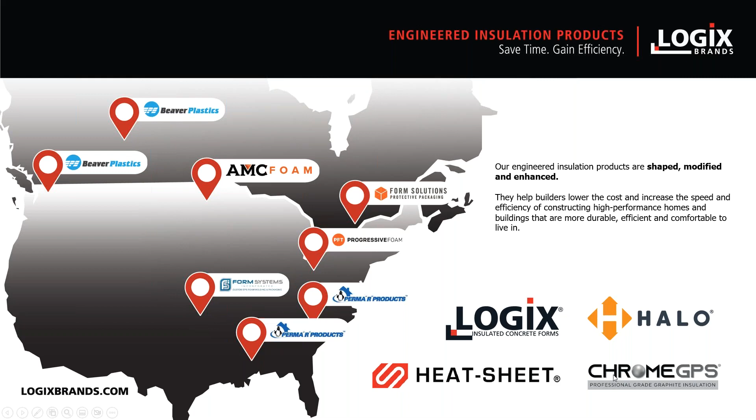And they're done so in a manner that helps builders lower the cost and increase the speed of construction while helping them build buildings and homes that are more durable, efficient, and comfortable to live in. So adding performance and increasing efficiency is all about the nature of our engineered insulation products. Here are the four brands of engineered insulation products that we go to market with: Logix, Halo, Heat Sheet, and Chrome GPS. And today we're going to be talking about the Heat Sheet product line.

So here's a picture of Heat Sheet, and we'll dive right into it quite shortly. You can see that it's certainly not a flat regular insulation product. It has been enhanced and shaped and molded, and we'll get into all the various advantages that Heat Sheet brings to the table. So here's our agenda today.

It's going to be about 20 minutes, 25 minutes, so we'll move pretty quickly. Product line overview. We're going to cover key design features and benefits. We'll do a case study. We'll talk about the difference of expanded polystyrene and extruded polystyrene. We'll talk about resources available to builders and dealers who work with Heat Sheet. And we'll talk about some insider tips, and we'll do, as I mentioned before, the Q&A at the end. So let's get rolling.

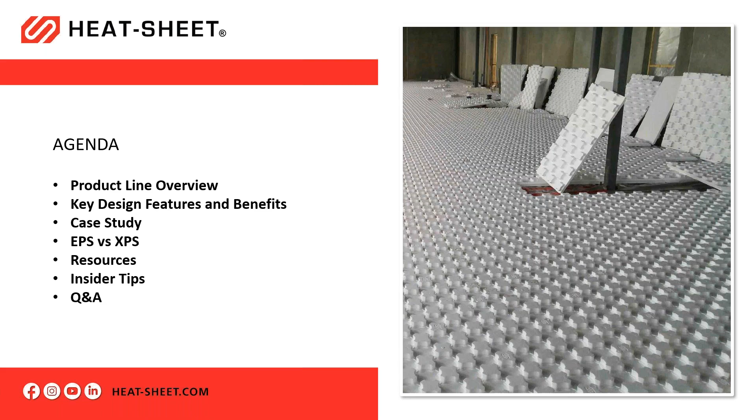First, I just want to give you a bit of a caveat. At Logix Brands, we know our products and we know what they do, and we're experts in engineered insulation products, but we're not experts in radiant floor heating. We're not HVAC designers, and we're not HVAC installers. So we can certainly talk about how our products fit into the process, but in terms of the overall radiant floor technology, we can answer certain questions to the best of our ability, but we're by no means experts in it. And I just wanted to qualify that.

So let's just get started. You can see here's the basic premise of Heat Sheet. It's a panel. It's got a track system molded into it, and you can see the Heat Sheet products being laid down on a job site. And you can see the PEX piping for hydronic radiant floor heating.

The PEX piping is actually laid into these grids, which create preformed channels that the piping can nest into and get secured into, and they're held in place, properly spaced, for a layer of concrete to be poured over, which, once the building's completed, is heated and provides great comfort to the building. So that's the nature of the Heat Sheet product line.

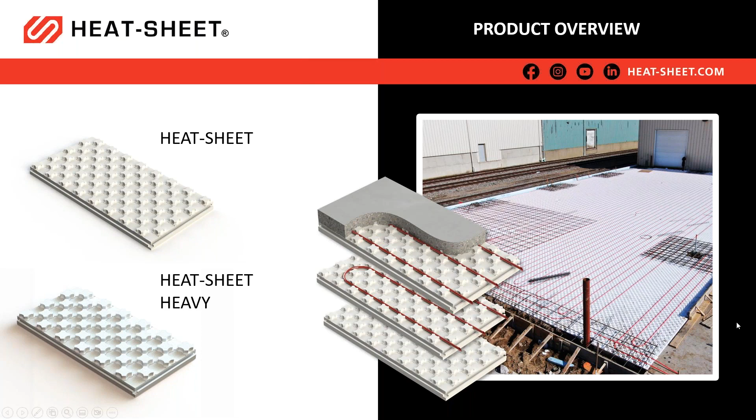There are two main components of the Heat Sheet product line: our flagship Heat Sheet product and Heat Sheet Heavy. And there's a lot of commonalities between the two. There are some differences, and we'll get into that.

So let's get into the very basics of heat sheet. So heat sheet comes in 4 foot by 2 foot panels. You know, we picked that panel size because we thought you could have made it bigger, you could have made it 4 by 4, you could have made it 4 by 8, you could have made it smaller, 2 by 2. We thought that 4 by 2 was just the perfect sweet spot for us and for our customers.

It's easy to handle. One person can pick up a bundle and move it around, and yet big enough so that when you're placing a product, you're placing enough square footage to make it an efficient process. Now, the nodules in basic heat sheet are 3 inches in diameter, and they form a grid pattern that's 3 inches on center. So the channels are 3 inches apart all throughout.

Now you'll notice that the panels do have an interlock right here at the edges. So the panels do interlock together and seal together. In terms of the compressive strength of the foam, heat sheet panels come in a variety of compressive strengths. The minimum compressive strength that they're available in is 20 psi, pounds per square inch. Often you'll see heat sheet offered at 30 psi, and it can actually be custom ordered to much higher compressive strengths, up to 60 psi for higher durability situations.

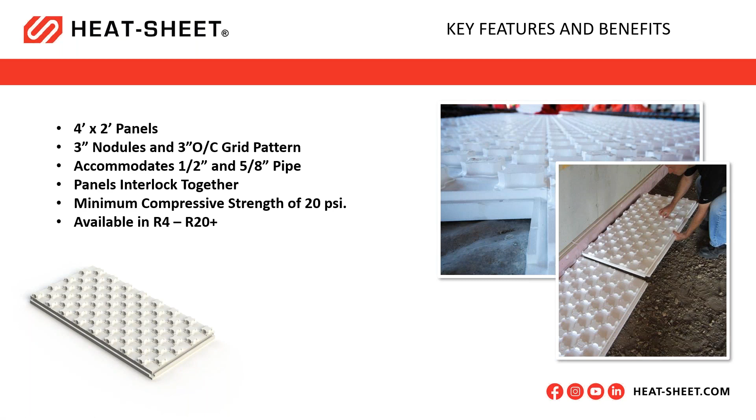Now, the basic core heat sheet panel comes in thicknesses from a minimum of R8 to a maximum of, I guess, basically R20, although from some plants you can order them thicker if you wish, but for all intents and purposes, let's say they go up to R20 on an off-the-shelf basis, and they're designed for regular under slab applications in homes and buildings. And I'd say probably it's our residential product line, although it can be used in commercial applications. And there's a picture of it in action there.

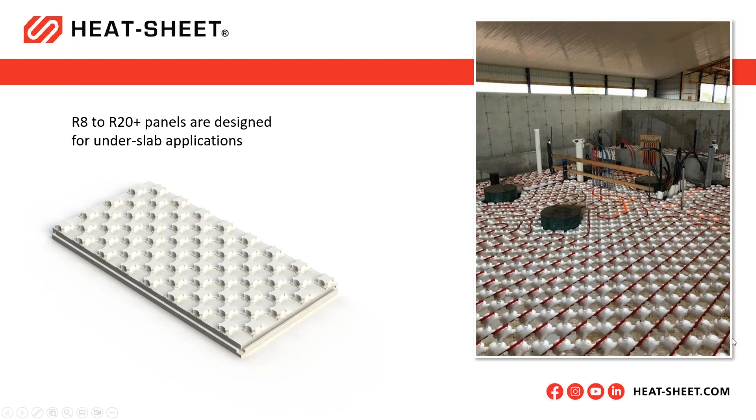Now, the thinner panels, thinner than R8, they're R4 and R6. And we kind of call them our retrofit panels because they were designed not so much for providing exceptional R value. They were designed to be thinner so as to conserve ceiling height if you're putting them into already constructed slabs or floor systems. Your primary concern at that point, you want to install your tubing, you want to provide a bit of insulation backing and give it a basis for the tubing to nest in, but you want to conserve ceiling space, head space, ceiling height at all costs. So that's what these are designed for.

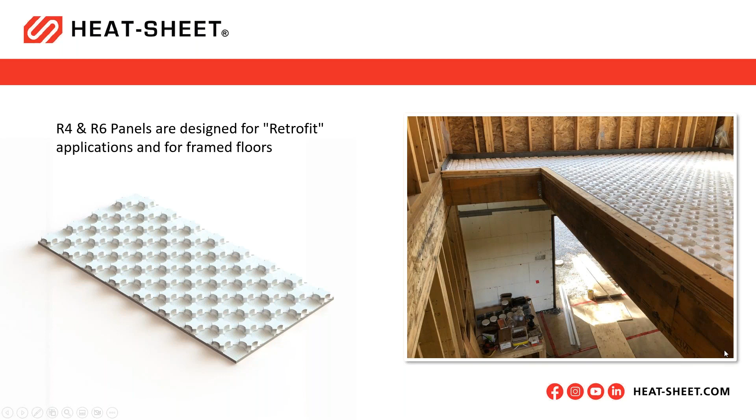And when you get to this thin profile, you can see that, of course, it's too thin to have the interlock, and so it's thinner and it doesn't have the interlock. And although we say it's designed for retrofit primarily, one installer actually used it in a brand new multifamily assisted living facility in British Columbia. These are cast in place concrete floors, and they were spec'd to be radiant floor heated, and the cast in place floors were already set.

The installer had to maintain ceiling space and headroom, and so just found a way to use what we would call our retrofit panels in a new construction situation. So it's always a case of you design something for a particular use, and then lo and behold, installers find different ways to use it out in the field.

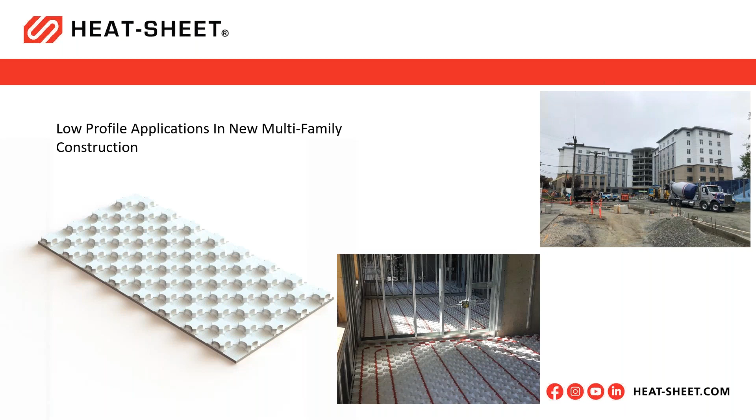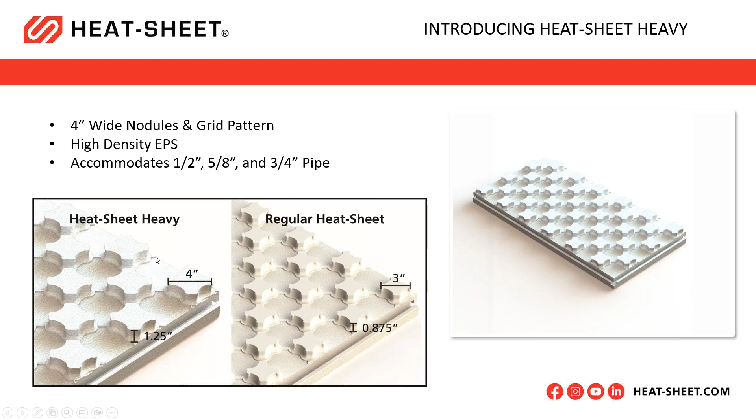And while regular heat sheet accommodates 1/2 inch and 5/8 inch pipe, heat sheet heavy will also accommodate 1/2 inch and 5/8 diameter pipe, but it also accommodates 3/4 inch diameter pipe for more commercial applications, heavier duty applications. So that's where we get the name heat sheet heavy. It's for more commercial, heavier duty applications typically.

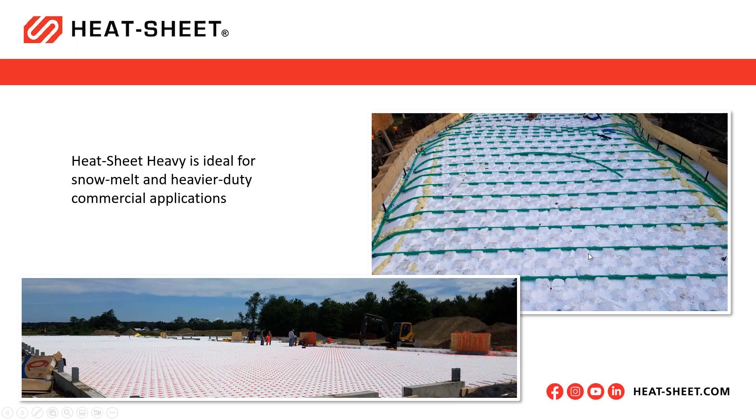And here's a commercial application for heat sheet. So a large slab with heavier loads, perhaps trucks, perhaps heavier loading conditions on the slab, and often used actually in driveways for snow melt applications. So not inside the building, outside the building, used in sidewalks and walkways and patios and driveways and parking lots to melt snow externally.

So, what's the basic value added premise of heat sheet? And there's a few of them, but it all starts and revolves around time and money savings. And the vast majority of the money savings and time savings comes in the actual installation of the PEX pipe. And we often say that HVAC installers who use heat sheet radiant floor panels never go back to the quote unquote old way. Here's the old way.

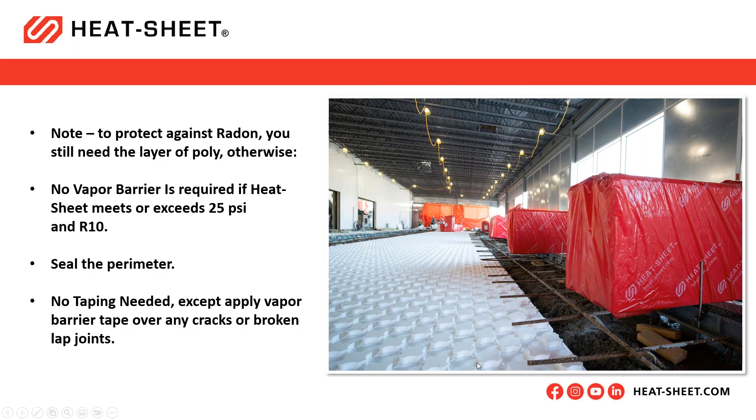And I'm just going to caution you, there's a little bit of soundtrack to this video. You might feel the need to turn your volume down.

Okay, so there you go. You get the idea. So that little video, it showed you the interlocking. It showed you basically the bundles that it comes in and how they're easily hand bombed. It shows, I thought, hopefully the speed and efficiency of installing it, and also the methods by which installers walk the pipe in. So that's just a little bit of an overview.

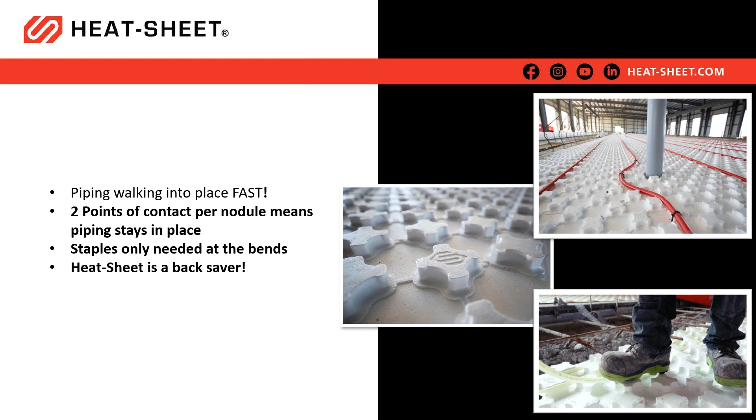Listen, job sites are not for the faint of heart. They're rugged places. There's equipment, tools. So you want your products to be durable, and that's why we designed Heat Sheet to be at higher compressive strengths. The panels are very durable. They resist breakage, and every time you break something, it's a needless waste of time and materials to replace it or tape it up or replace the material. So Heat Sheet's designed to resist all of that.

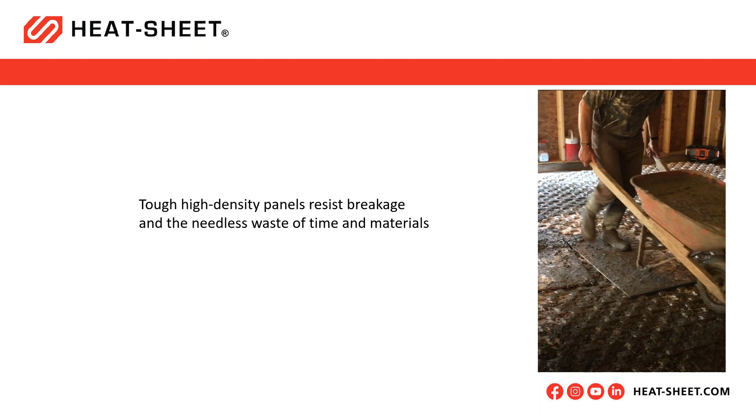Brendan Benoit with Meridian Plumbing and Heating, laying down some Heat Sheet and some in-floor. Favorite part? Definitely walking it in. That ease of installation compared to rebar, off the charts. I've only installed in-floor heating on rebar. This is night and day compared to that. Tying everything down every 1 foot as compared to this, just walking it out and clicking it in. This is a knee saver and a back saver.

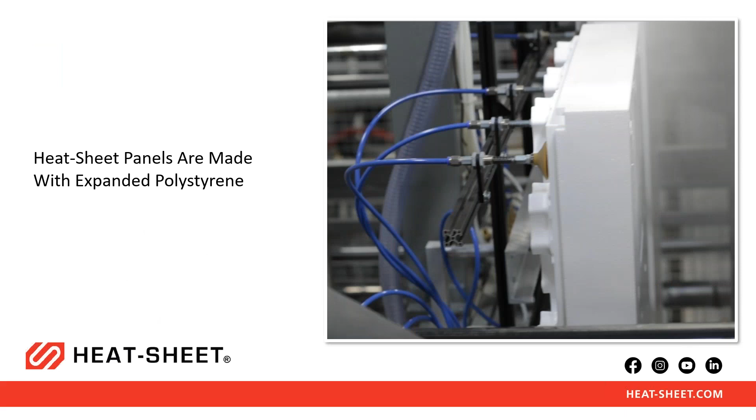So there you go. Let's get into now why Heat Sheet panels are made with expanded polystyrene. Why did we choose EPS? And what are the benefits of EPS versus XPS, which is a very popular competitive line of insulation? And for this discussion, I'd like to bring in Francis. Are you there, Francis? I'm here. All right, Francis, can you just take everyone through quickly some of the main benefits of EPS versus XPS?

Okay, so I'm going to compare EPS with XPS, and we're going to talk about water retention or water absorption, because I think that's where it gets compared most of the time. So there's this misconception out there that because EPS does have a higher water absorption than XPS, you can't use it for certain applications, specifically potentially wet environments. It's true that EPS does absorb more water initially because of its higher permeance, but because of its higher permeance, it also allows that water to escape just as easily. So it actually does a good job at retaining its R value, better than XPS does because XPS has a lower permeance.

Unfortunately, the standard test for water absorption is based on short-term testing. It only requires small samples to be immersed in water for up to 5 days and then immediately measured for water absorption. The problem with this test, though, is it doesn't actually tell you how much water is still left in those samples after a month, a year, or even 2 years from now. So it's not really indicative of real world conditions. This test standard is meant for quality control purposes, not to represent end use conditions, and it actually says that right in the standard itself. But these are the properties that we have to report to make public. And I think designers see these values and conclude that they represent end use conditions when they actually don't.

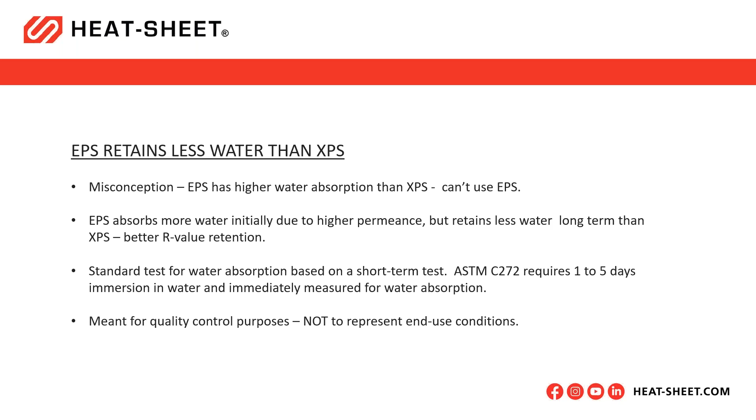But what we do know from independent testing is that there are long-term effects on R value due to water absorption. We know that EPS retains less water than initially absorbed, and that's because of its higher permeance. So any water that does make its way in there over time can get out just as easily. So it maintains its R value. XPS retains absorbed water longer, and that's because of its low permeance.

So any water that does make its way in there long term actually gets trapped in there much longer because of its low permeance. So as long as the water is sitting in there, it's reducing its R value. There was one study where samples were buried for 15 years. It showed on average that the XPS samples had 19% water absorption and retained only 52% of its R value. EPS had 5% water absorption and retained 94% of its R value. So this is all indicative of the permeance properties of these insulation materials.

What does this all mean? It basically shows us that EPS actually does a good job at retaining its R value, better than XPS can, especially in potentially wet environments.

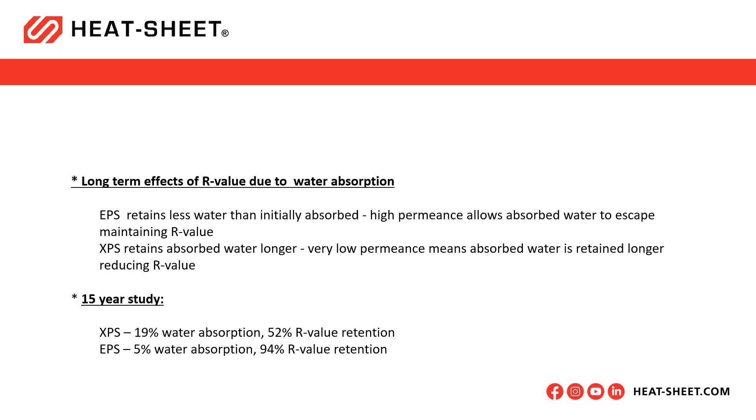Well, thank you very much, Francis. And so in summary, Heat Sheet, rather than a flat XPS panel, will retain its R value longer and will actually save you time and money installing the PEX pipe. So that's the basic value proposition in a nutshell.

One other thing, embodied carbon and global warming is a concern for many, many people. And there's a growing movement to use building products with lower embodied carbon than those with higher levels of embodied carbon. And one other advantage of EPS is it does have less embodied carbon global warming potential than comparable XPS products. So the XPS products are kind of all over the map.

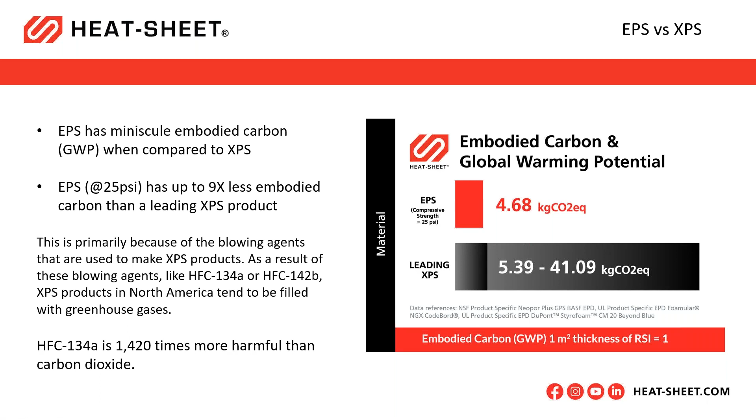This is the measurement of embodied GWP. So as you can see, depending on how the XPS is made, it's from either 5.39 to 41.09. The EPS that we use in Heat Sheet is lower than the lowest and up to 9 or 10 times lower than the highest. And it's all got to do, I think, mostly with the blowing agents that are used in the XPS product. So in addition to everything else, lower global warming potential, less embodied carbon.

And one other thing, the new XPS has gone through different iterations. There have been regulations because of the high global warming, so they had to change their manufacturing processes. It turns out that this new manufacturing process does have somewhat lower GWP, but it tends to use 15 times more fresh water in its manufacturing process for some reason. That's an incredible amount of fresh water. And so it's another reason to consider using EPS, the conservation of fresh water.

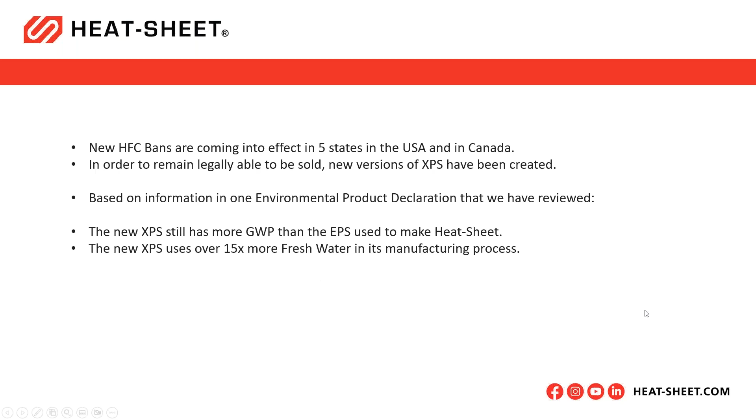Anyways, on to available resources, next part of our topic here. For installers and dealers who handle Heat Sheet, there's installation guides available. And by the way, our basic Heat Sheet installation guide is attached to your control panel in the handout section, so if you'd like to download that, you can. There's also a Heat Sheet product information sell sheet that you can download as well if you wish.

But there's also telephone and online support offered by our dealers and actually offered by our manufacturing plants. At the Logix brands level, we have regional technical advisors available that can answer questions. We have a network of local stocking dealers that have Heat Sheet ready to buy. Just walk in and pick it up. And you can find the location of those on heatsheet.com.

There's a section on heatsheet.com we call our where to buy locator. Just tap in your location and you'll see the nearest manufacturing facilities or stocking dealers near you. Have trouble finding someone close, feel free to send us an email and one of our technical advisors will be back in touch with you.

We also have a handy 1-minute estimator on heatsheet.com where if you simply tap in the dimensions of your install, your slab, it'll quickly size up and tell you how many Heat Sheet panels you're going to need for your project.

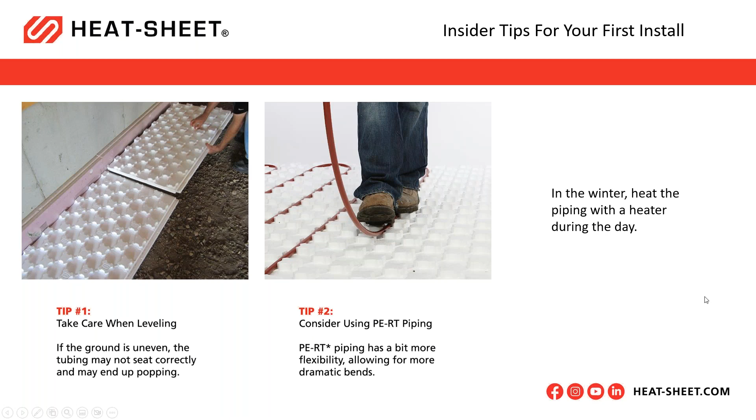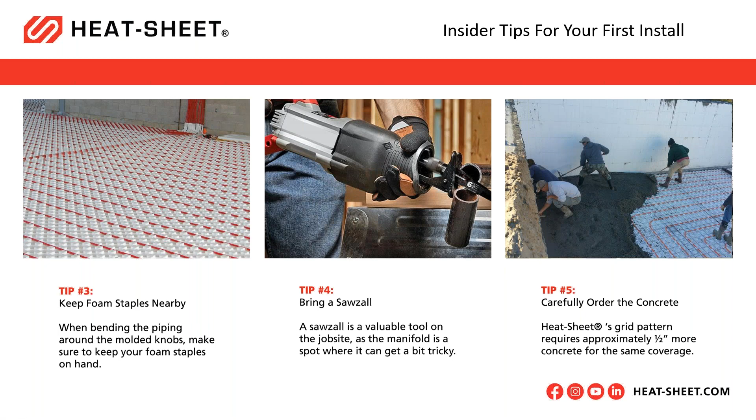And in fact, the heat sheet 1 minute estimator does actually give you concrete values as well. If you type in the amount of heat sheet product you need, it'll also ask you to type in the thickness of your slab, and it'll give you the rough amount of concrete.

Okay, so Francis, I'm going to ask you to talk about this. With heat sheet, the tubing is actually fixed towards the bottom of the slab by design, and it has been brought up to us at times: wouldn't it be better and more efficient if the tubing was in the middle of the slab? So Francis, can you just explain the thinking here?

But also the other added advantage to having it at the bottom of the slab is if you're having to penetrate the slab for, say, a frame wall or something, there's less chance of you hitting a PEX tube than if it was mid slab. That makes sense. Okay, thank you very much, Francis.

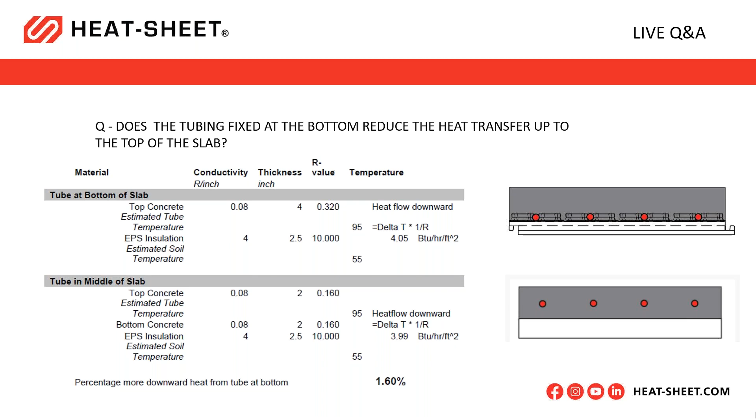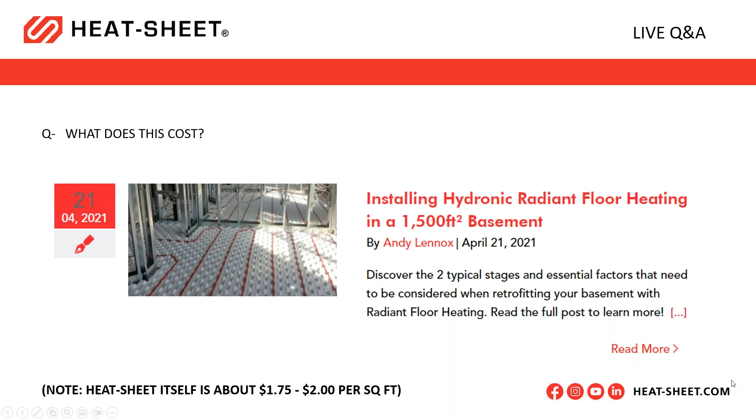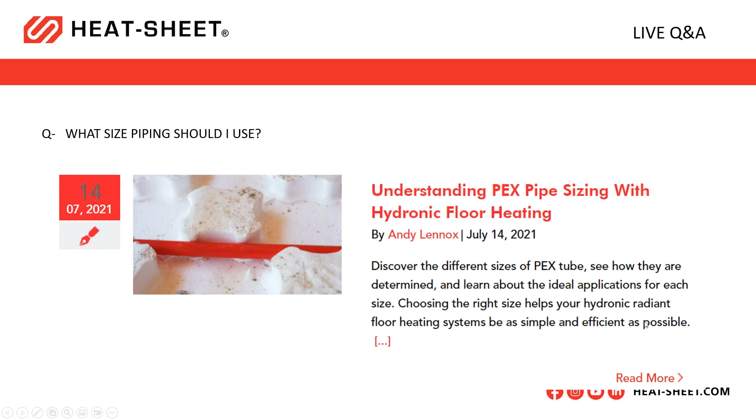Why you should consider snow and ice melting. It's becoming increasingly popular. And we've got a series of blog posts on that topic. Is it right for you? Is it right for your climate zone? If it is right for your climate zone, how do you do it? If it is right for you, how much does it cost? So there's a whole bunch of content, but certainly yes, you can use this on your driveway or your sidewalks or your walking surfaces outside.

And what's a radiant floor heating rough-in? This is an interesting thing. If you're a builder doing spec homes for the public, and you're looking for very cost-effective upgrades to offer your clients to differentiate your house versus the house next door, what we're seeing a lot of builders doing is what we call a radiant floor rough-in in the basement slab.

So in other words, instead of just pouring a slab with regular XPS insulation and a regular slab, they'll put down some Heatsheet, they'll put down the PEX pipe, which doesn't cost very much, then put down the slab, but they don't have all the connections done to the boiler, the hot water. It's just a rough-in, so that if the customer wants somewhere down the road to hydronically heat their basement slab, they can hook it up. It's a brutal thing to install tubing in concrete after the fact. So it's a very low cost and effective upgrade if you're building a new home.